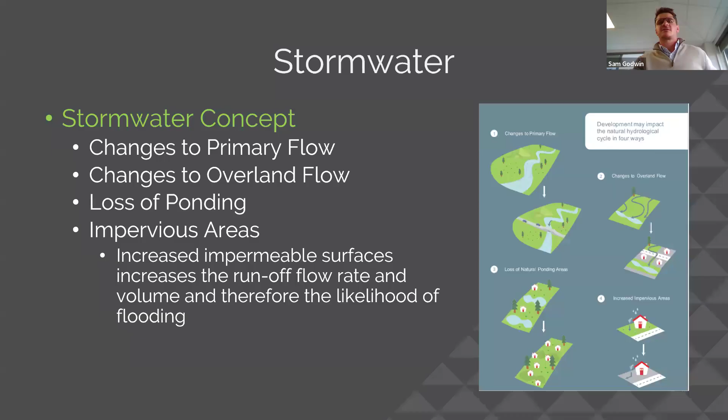So one of those things around the impervious surfaces, an introduction of that is stormwater neutrality. This has been something that I've had to consider since I've moved up to Wellington and Cuttriss, so for at least the past 6 years. And the concept is that you are detaining stormwater flows, the increase in flows on site, and it is released or controlled by a small orifice to be able to control that flow rate.

And what you're ultimately trying to achieve is the runoff post-development, so after your development's built, needs to be the same or less than the flow rate that was leaving that site pre-development.

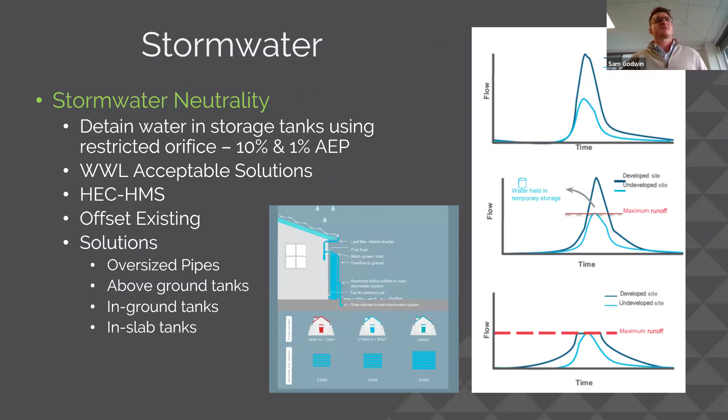So unlike stormwater neutrality, which focuses on our previous slide, looking at the 10% and 1% AEP events, so that's your 1 in 10 and 1 in 100 year storm events, so quite large events. This really focuses on the smaller and more frequent events, so talking about kind of a 2-year, 24-hour event.

And it's looking at trying to reduce scour in the streams, and some of the fish that are in these freshwater streams that may be used to having to navigate little bursts of water during a storm event, but due to the increasing development that we're seeing, they may need to navigate what was a quick burst of water for a longer period of time, because we're now, with our neutrality concept, holding water back and releasing it for a long period of time.

Unlike stormwater neutrality as well, you don't get to look at the pre-development state and offset from existing impervious areas. You have to consider the pre-development site as a greenfield site, and it has very low triggers in order to require the need for retention. And that is around about 30 square meters. So it catches things such as, if your architect's doing just a single house design, you don't need to subdivide in order to trigger the need to consider stormwater retention.

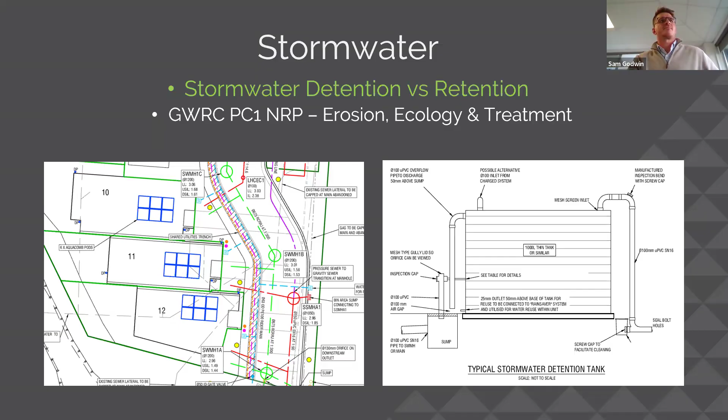And the most straightforward one being that you test for soakage in the area, which is not awfully common throughout Lower Hutt. There's a lot in Upper Hutt, so it's an easy solution there. You're putting the design storm, so the small storm event, into soakage, kind of having groundwater recharge. If you don't have soakage available, then basically it can trip you from being a permitted activity to something where you can't meet those requirements, and therefore you have to apply to Greater Wellington Regional Council for a stormwater consent. So that's all on stormwater.

One of the other considerations that's come up, that actually wasn't here when I got to Cuttriss in Wellington in 2019, is this concept of wastewater mitigation. So with your traditional wastewater network, you can have a gravity lateral coming out of your dwelling, likely connecting to a gravity main in the road, and that, depending on topography, might go through a pump station before making its way down to the treatment plant before it's treated and sent out to sea.

We hear a lot in the media, and there's been a lot of movement around underinvestment in our infrastructure. For wastewater, leaking pipes may result in a whole lot of stormwater getting in there. You may have cross connections, groundwater infiltration. We see a lot of tree roots making their way into sewer pipes, which reduces their capacity. And all these things result in these pipes being at their full capacity, not necessarily just due to wastewater, but all these other problems if they are aged pipes. And a lot of the stuff around the Hutt here was installed around the 1950s and hasn't been renewed. So there's a lot of old infrastructure.

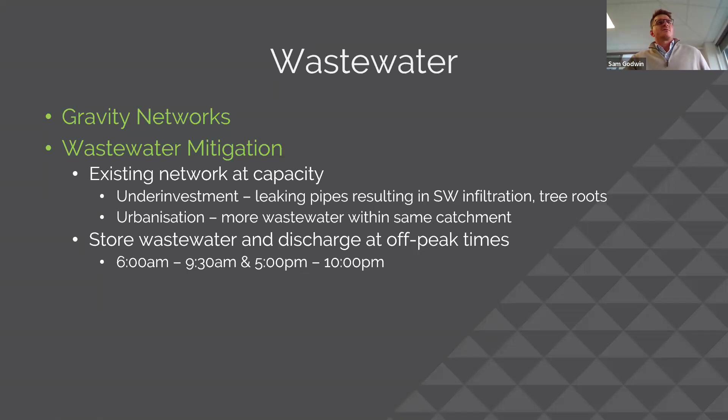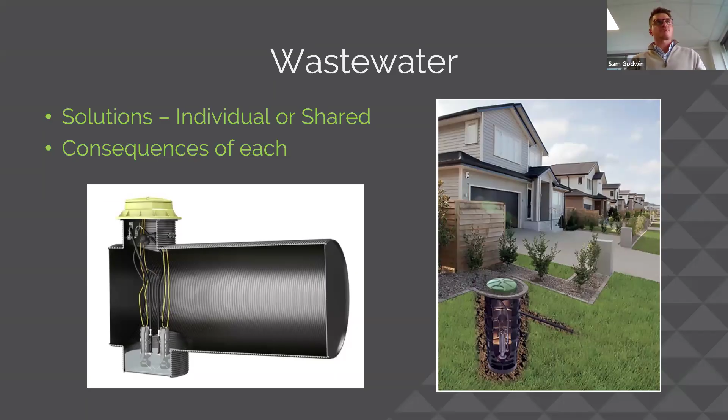The other thing is that it often requires residents associations to be in place to properly manage these systems, so there's some sort of structure and funds going into a shared bank account so these costs can be managed. So that's wastewater mitigation.

So flooding. I've classed this into three types of flooding, or scenarios, that need to be considered. We've got no known flooding. Wellington Water has done a lot of work over the last 6 years trying to map the wider Wellington region so we can understand where sites or areas are inundated or subject to overland flow in the 1% storm event. If you're lucky enough to have a site that isn't subject to any flooding, you can set your floor levels in accordance with the New Zealand Building Code, and that might be 150 mil above the crown of the road as a minimum, or if your site's falling away from the road, 150 above the rear of your property.

A first type of flooding is inundation. So that might be a low area where you've got ponding, not necessarily having flooding that has any velocity. And then you have overland flow. So that might be where you've got some level change throughout your site or in the road, and you then have a concentration of flood waters, which has a velocity, which is often harder to manage.

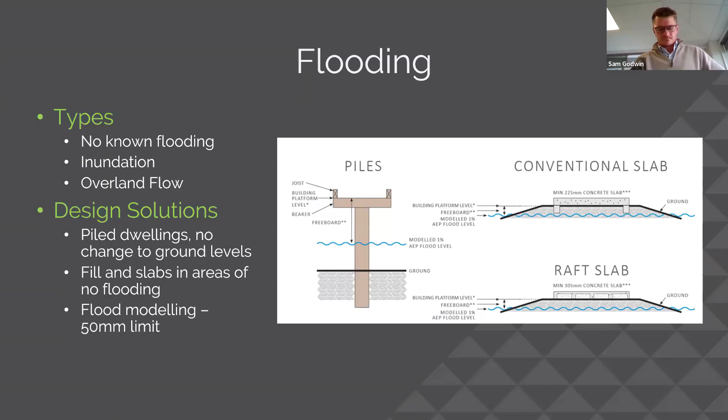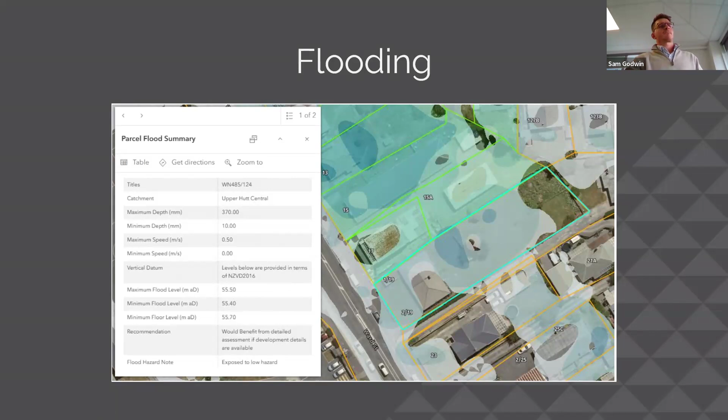Just to quickly touch on geotech again. As I said, we don't have in-house geotechs, but it's something we need to consider as we're designing these developments: the landform, understanding earthworks volumes, what you need to dispose of off-site or bring into site. So there's a New Zealand document, NZS 3604, which talks about defining good ground. They define that anything with a bearing strength or capacity of 300 kPa is considered good ground. And what that would allow you to do is put a standard 3604 slab on the ground.

If you can't meet that requirement, you may need to get into doing some ground improvement. And the two main solutions that geotechs use in our area are gravel rafts and piling. So if you've got poor material near the surface, but you've got some good material or soils down low, gravels or rock, you may be able to pile down and have end-bearing piles.

Otherwise, in the likes of Wainuiomata, for those that are familiar with the Wellington region, it's very poor ground over there, and we tend to use gravel rafts up there. Gravel rafts involve undercutting, say, around 600 millimeters, removing that material off site, and then laying geogrid, which is a product to enhance the strength of the soil, and backfilling that in layers with an aggregate such as AP65.

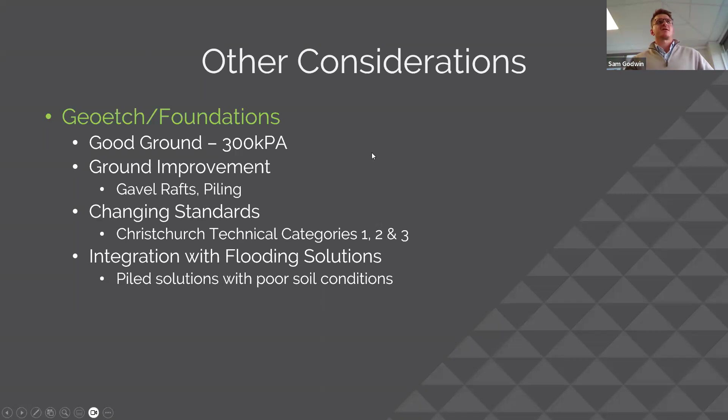Roading: some of the main design standards that we're using here are NZS 4404, which a lot of you will be familiar with, and another one I commonly have open is 2890, which is the off-street car parking design guide. At Cuttriss, we work across quite a lot of different councils, and some of the ones I'm regularly working across are Wellington City Council, Hutt City Council, and Upper Hutt City Council, all of which have different ways of doing things. Some, such as Wellington City and Upper Hutt, have their own code of practice, which you need to consider.

Hutt City Council points to 4404, but all the councils have reviewed their district plans, and what we're seeing is a lot of them are being more prescriptive within the district plan about their own requirements when it comes to roading or off-street car parking. And they also seem to be over and above the requirements of what we see in 2890 and 4404.

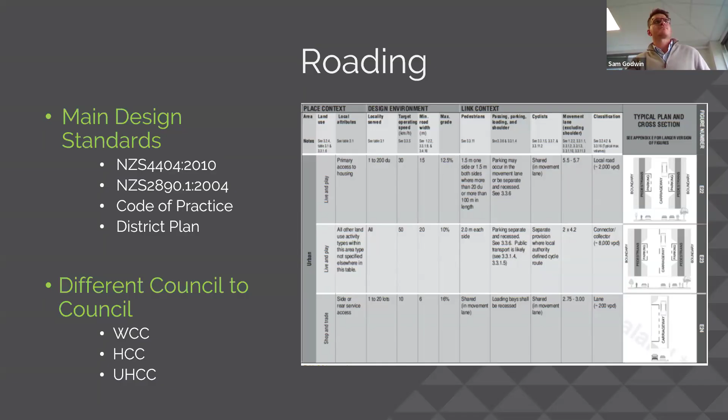And lastly, just a bit on the due diligence advice. So we do this with some of the developers we regularly work with, or like any of us, if you have a new client, you want to make sure that they're informed before they proceed with spending a significant amount of money on any development. So when I was talking about the geotech solutions and needing to pay twice for a foundation solution, you want to make sure that your client's informed before they get into it and knows what they're getting into. So making sure the feasibility stacks up.

So some of the key things we look at when we're having a high level quick look at a site will be, if we need to, seeking some comments from Wellington Water, on things like the capacity of the three waters infrastructure. We know stormwater neutrality, the concept we talked about at the start, is required as a standard, but you're testing to see whether wastewater mitigation may be required and whether that needs to be factored into the feasibility of the development,

and checking to see whether there's enough pressure and flow in order to adequately supply the site with water, and other things like hydrant locations to make sure that conforms with the relevant standards. Also, what we get from Wellington Water, as you saw earlier, is a flood map and an understanding of whether the site's subject to flooding.